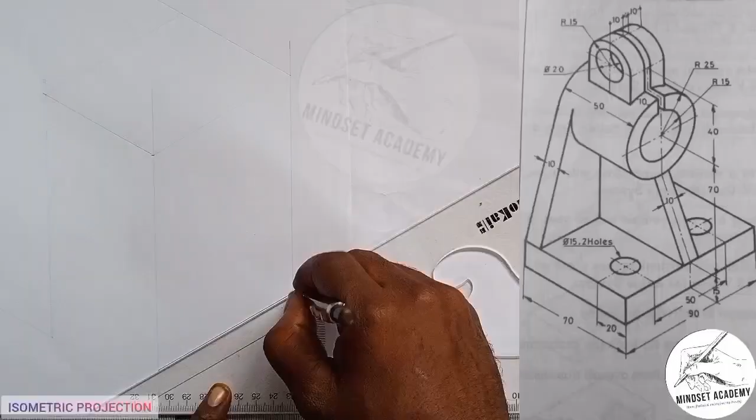You're welcome to my channel, Mindset Academy, where we want to reproduce the figure that is displayed at the right hand side of the screen in isometric. It is a machine component and we are asked to reproduce it in isometric.

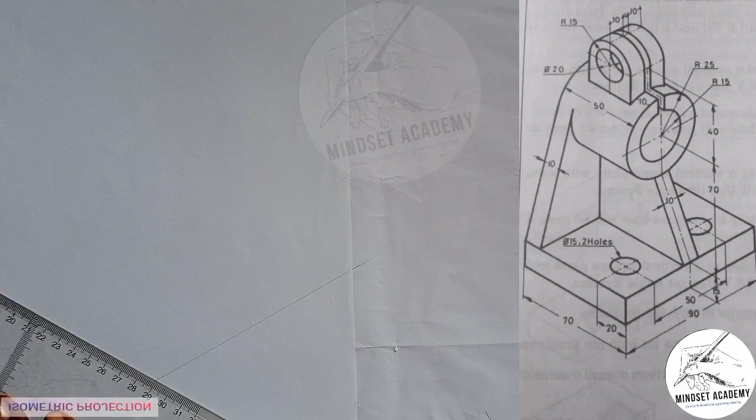So the first thing you have to do when you hear the word isometric is for you to draw your isometric axis, which will have the x, right? Let me make this more visible. We have the x, and also we have this also, and also we have the y. That is all the height.

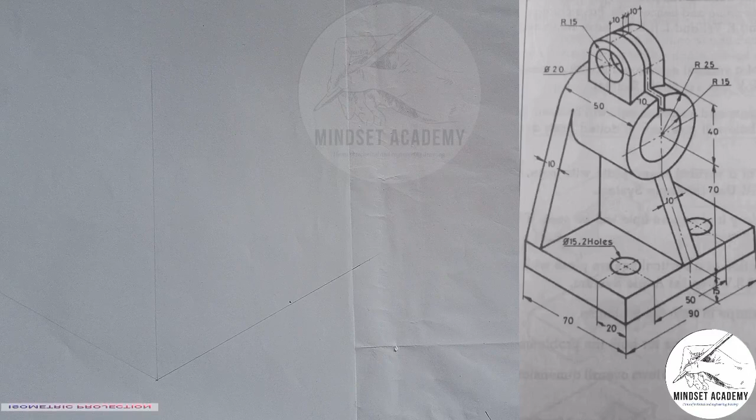You can see that. Now the next thing we'll be looking at will be the entire length, which is from here to here, and they're giving us 90. And I'm going to measure the 90 on my meter rule. From this point, I'll measure 90. This is my point 90 here. Then the entire from here to here, which is 70, is from here somewhere around here, and I'll measure the 70. So from 0 to 7, giving us 70.

Consider that. Then the entire height is given to be from this point to this point is 15, plus from this point to this point here is 70, making 85, plus from this point here to this point here is 40, making 125. Then from this center here to this circle here, radius is what? Is 15. So 125 plus 15 give us 140. So the entire height is 140. So we'll just measure 140 from this point here. This is 140 here.

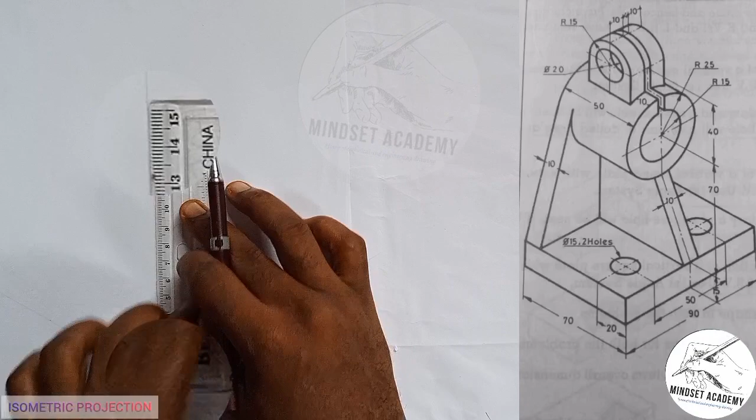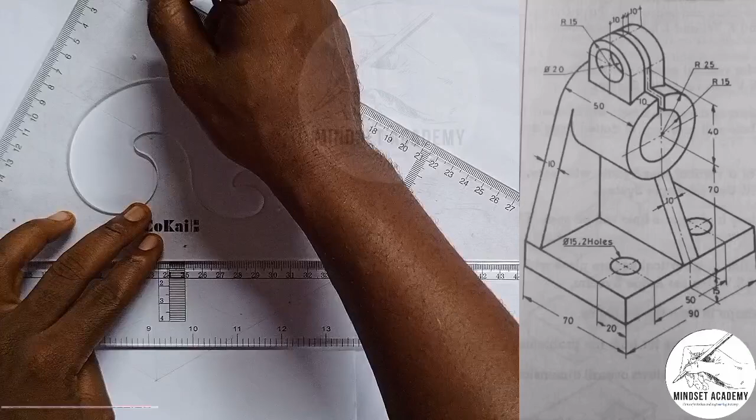Right? Then I'll now complete it by drawing my vertical lines on each of these points. I project this point up. I also project here up too. And I'm going to close it up too. Here too. And here too. Right? So let me just bring that down a little bit. So now this is what we all have here.

Now the next thing we're going to do is to start carving out the image you can see on the right hand side of the screen. Now we know very well that from this point to this point is 15. It's from here to somewhere around here. So I'm going to measure 15. From 0 to 15. This is 15 here. You can see that. And I'll use my set square.

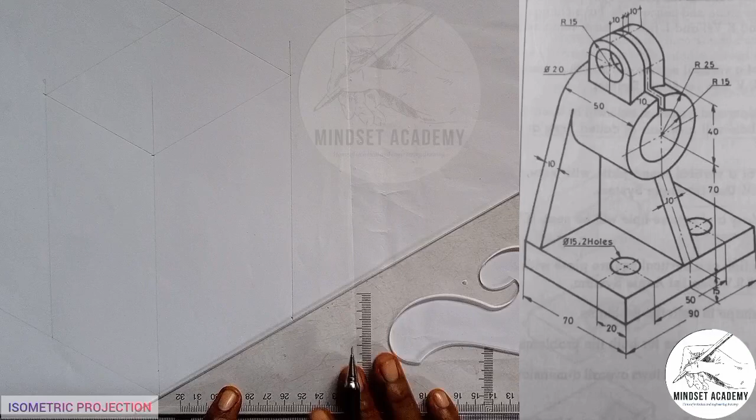What you can see is that they're all thickened. So you can start thickening them here just to save our time. From here to here, it's thickened. Then 15 I measured is also thickened. Right to this point too, which is thickened too. I'm going to take it from here. And also take it from here too.

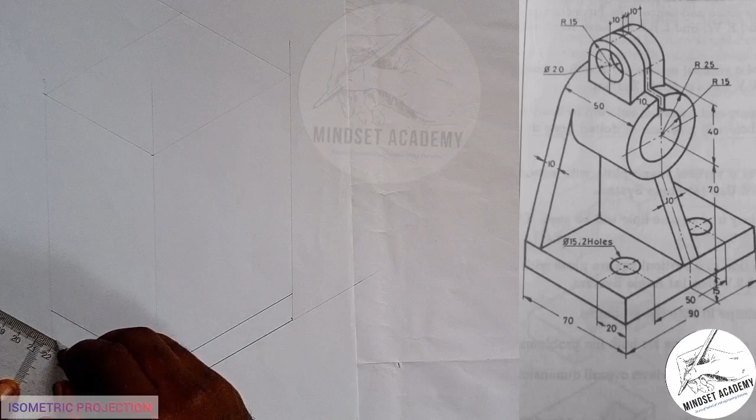Right? And I'm going to close it up this way. I'll close it up too this way. And at this point too this way. You can see that. Now I will just try and complete this point. At this point here, just draw a line to make it form a box. Faint line.

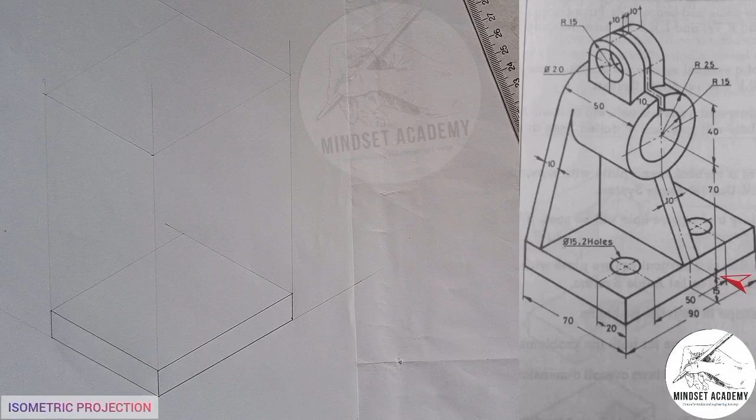Good. Now the next thing I'm going to do is that the thickness from this point to this point is given to be 10. But I need to get the height first. The height from here up to the center of the circle is given to be 70. Now we're talking about center of the circle. So the first thing I'm going to do is to get the center of this figure here.

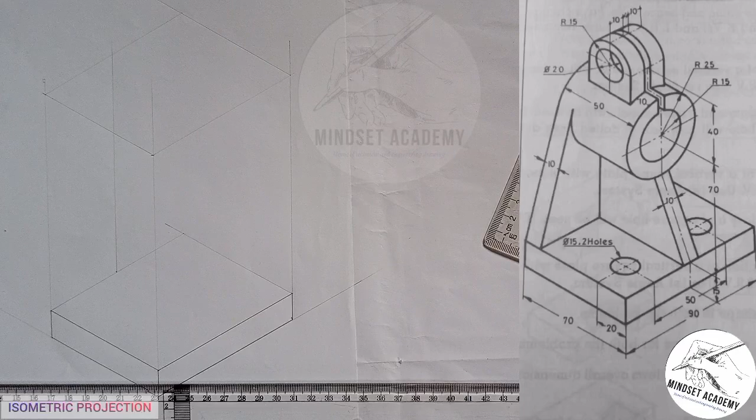So to get center of the figure, we know it is 90 from 0 to this point. What I need is 45, half of it, right? So once I get half of it, I'm going to project it up this way, right? So on that line, I'm going to measure 70 because 70 is from this point here to this point, which is the center of that circle. So I need the center of that circle. That is where I'm going to start my measurement from, right?

So I'm going to measure the 70. So from here, I'll measure the 70, from 0 to 7 is 70, right? Now what I'll do again is I'm going to project that line of 70 in this direction. You see that? That is where the circle will fall in.

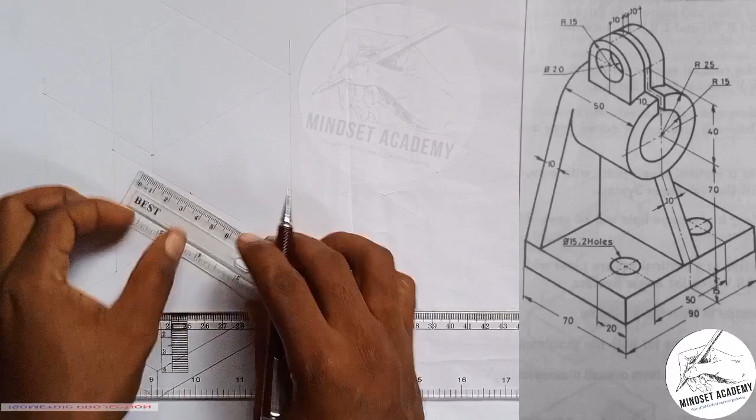Now if you look very well on that line, you discover that the length of that cylinder there is 50, right? So I'm going to measure 50 on that point there. So from here to here is 50, right? So on that point 50, I will draw four intersected lines. Like I'll draw my vertical line on that point this way, right? And I'll also draw the horizontal line this way too.

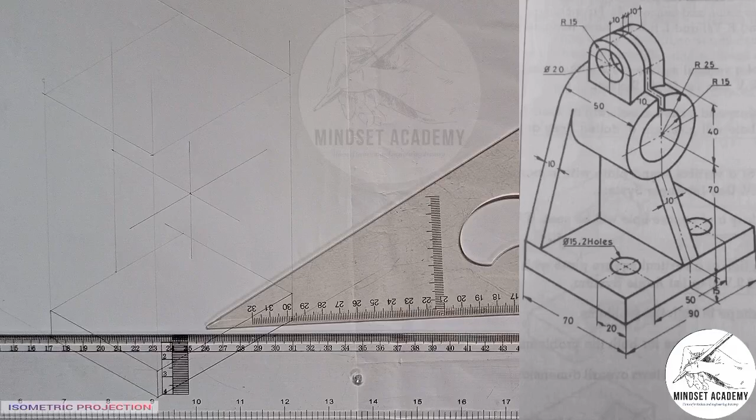You see that? So on that point, I'm going to construct a circle on that point there. Now the radius of this circle here is given to be 25, meaning diameter is 50. So I'm going to take radius of 25 and I'll start working with it. Radius of 25, I'll measure it on my meter rule. You can see that from this point to this point is 25. So that is what I want to construct that outer circle.

So I'll measure 25 on my meter rule. 0 to 25 here. Alright. And I'll place it at the center point here. Right? And I'll mark up, left, right, and down here. So on that point, I'm now going to draw a box. Right? I'm going to draw what? A box.

So I should do this way, passing through that point. I'll come again, passing through this point. I'll do the same thing. Then I'll stand it up this way, passing through that point. I'll do this way, and this point too, passing through this point. I'll do it this way. Now this is the box I have brought out.

So what I'm going to do there is I am going to start constructing my circle by joining the diagonal first from this point to this point using ordinate method to construct the circle. So I'll just construct here to touch here. You can see that. And the next thing I'm going to do is to pick a point from here, the center point. You can actually start from here, depending on what you want.

Then I'll join it to this point, right? I'll come also, I'll do the same thing. I'll join it to this point. Now this is where they are meeting, and that is where I'm going to construct my circle. First of all, I should be able to use faint line to construct the circle. So when I place it at this point, I'll take it here. Now see, faint line first.

Right? Then I'll come here too. I'll place it here, right? And I'll give it 2, ensuring that it is touching there. So just like this. Right? Then I'll place it here. I'll do the same thing here too. Connect from this point to this point.

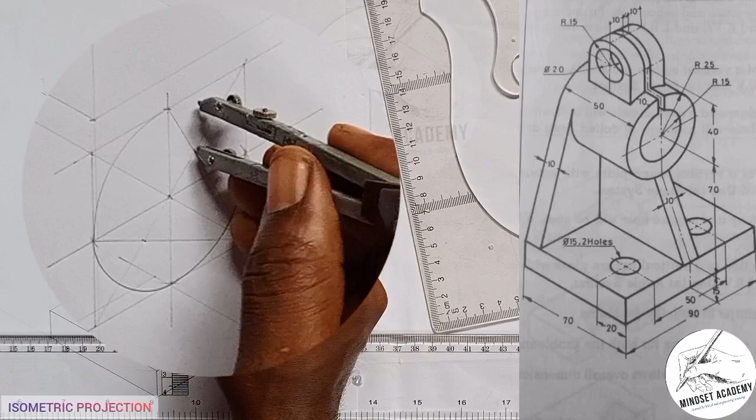This is what we have. You see that? Then I'll come here too. I'll do the same thing. I'm going to do the same thing here. Right? Now, after we've done that, we've brought out this circle in faint line first.

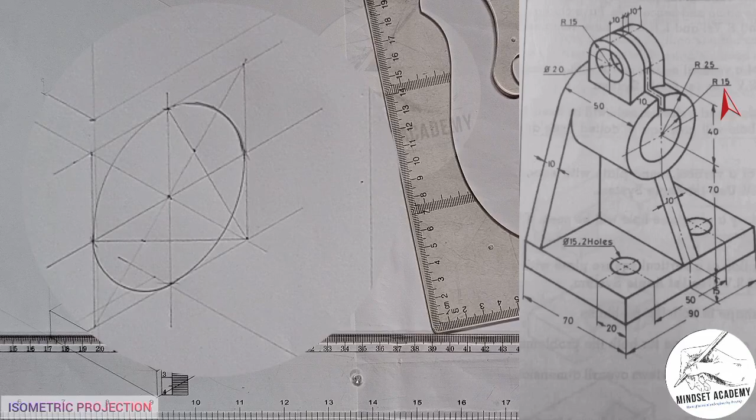Now the next thing we're going to do is there is another circle inside of that circle which has a radius of what? Of 15. But before I'm going to do that, let me just construct that. So let's move forward. Radius of what? 15. So I'll do the same thing. Measure 15 on my meter rule this way. 0 to 15. Right? And I'll place it at the center point again.

I'll mark up. I'll mark left. I'll mark down. And I'll mark right. This way. So these are the points that we have here. Right? So I'll draw my line passing through those points. So starting with this, you have this way. Then I have this too. Right? Then I'll bring it down. And I'll bring this down too. So I brought out that shape, right?

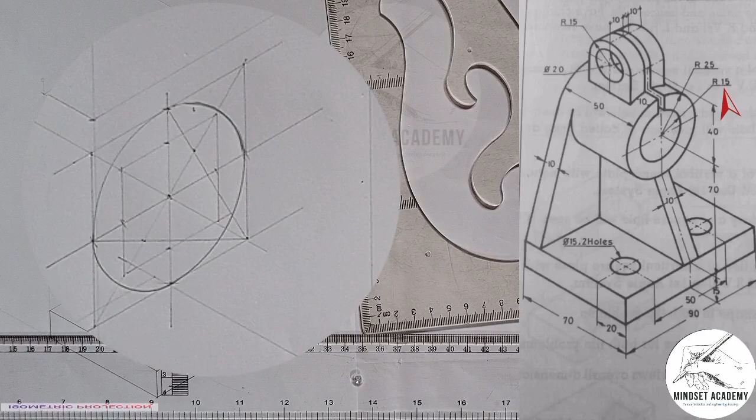So now you do the same thing. You take your pencil and your rule, just like what you did here. You did here too. Take your line from this point using ordinate method. And I'll join here to here. And I'll also join here to here. So this is where they're intersecting at this point again. That's for the smaller circle. So once I place it at this point, to this point here,

we have this. Right, I'm coming to do the same thing here. You can see that. Okay, now come here. This point where the line meets here. And do the same thing. And here too. So now this is the circle that we brought out here.

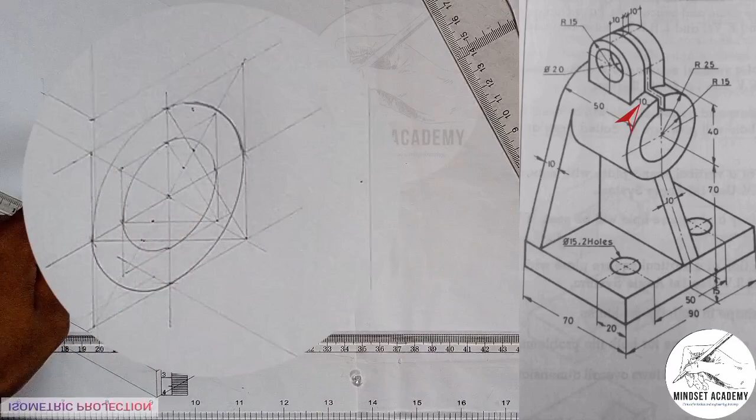So the next thing we're going to do is that if you look from here to here, it's 10 millimeter away from this point here, right? Is what? 10 millimeter away. And from behind also, we have another 10 millimeter. How would I say 10 millimeter? This figure on this object here, this figure you see, the radius is given as what? As 15. You can see from here to here is 15.

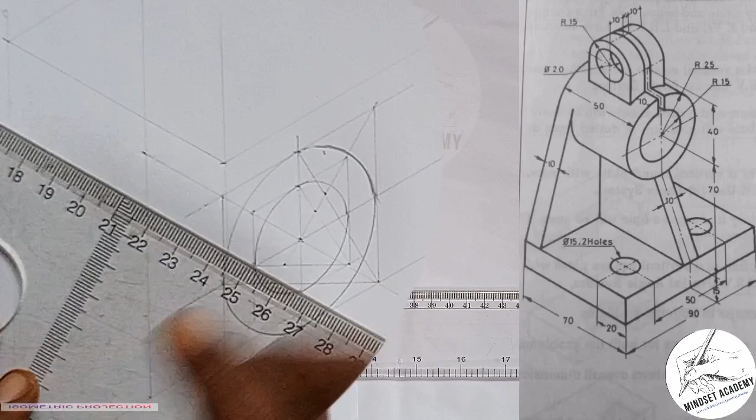That means the diameter of that curve there will be what? 30. So that means the distance from here to here is given as what? As 30. So once I remove 10, I measure 30, the remaining part will be what? Will be 10. What I mean is this. If I project here out this way, the end of this here, right? Or better still, let me stick with this.

So once I project here out this way, that is the edge of my box. I'm going to measure 10 first. Let me start with 0. I'll measure 10. Then the next one will be what? 30. So it will be 0, 10, 20, 30. Then the remaining 10, because the entire length of that figure is what? Is 50 altogether now, so it's remaining 10.

So what I will just do there is I'm going to construct my box at those points there. So if I complete this way, right, then I'll complete this too, this way, and I'll bring this down this way, right, then I'll close it up this way, I'll close it up too, then here too.

Then the end point here that I brought down here, I'll close it up, and this one too, I'll bring it down too. Close it up, right? So it's remaining this. You see the reason why I'm doing all this? Take this out, bring this down. So this is what we have.

I brought out 4 points. Why? Because we have 4 circles there. From here is one circle behind. Here another circle making 2. At this point, where this shape will fall on, the other circle, that is 3, then this making 4. So I'll start constructing the same thing I did there. But it is easier now with the way I've done it.

How? I have a diagonal here, right? I'll also draw another diagonal here too. In every point is a diagonal like this. You can see that. This is another diagonal. And this is another diagonal here. So I drew a diagonal for every point. Is that taken? And what I'm going to do now is to transfer the points.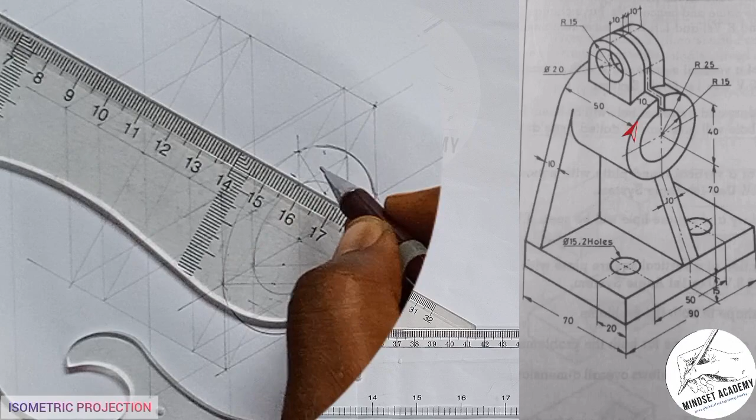Which point am I transferring? This bigger point here, this one. So I'm going to transfer it to each of those points. So this one is 1, this is another one here, this is another one here, this is another one here. I'll come down again, the other big one, this point again, I'll transfer it to this point, to this point, to this point. Now you see what I'm trying to do.

So here, this is my reference point, and this side also is where I'm going to end it. So what I'm going to do now is, if I place my compass at the end of this rectangle, which is this point here where they are meeting, I'll take it to this point and I'll draw this arc here. You can see that.

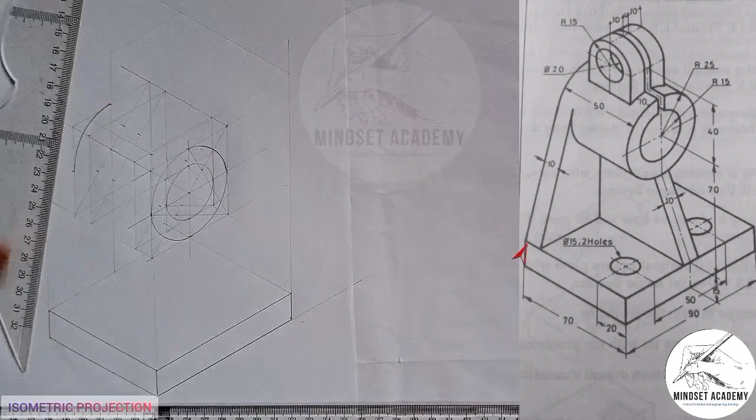What else am I doing? I'm going to join this point from here to here. So I'll join it to this point here. You can see that. Now the next one, I can easily project this way, right? Now we'll do the next one. What I did here, I'll do it for the other side too. So I'll use the second side here, which is this. I'll come to this point, and I'll move to this point.

Just a faint line first of all, right? Then come to this point. Then I'll give the remaining one too. You're going to get that. Just that. Then I'll come here too. After doing that, I'm going to join this point.

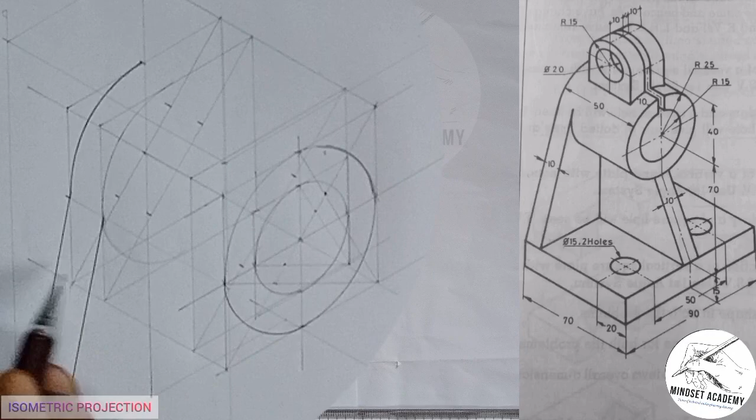I'll measure 10 here because the distance from here to here is 10. From 1 to 2 is given to be 10. Then I'll connect this point to that point. You can see that. When I'm doing that now, from this point here, I'll join it to this point. The center point here, I'll join it to this point here with my faint line first of all. You see that?

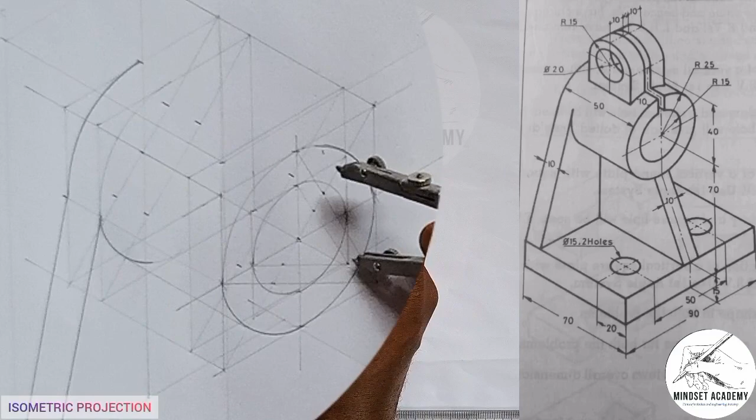You see that? So the next thing I'm going to do is construct another arc at this point here. Now I drew an inclined line here this way. So when I place it at this end and I take it to this point here, I'll draw another one here. Get this straight line first.

Right? And then I can come to this point, and I'll have this point I marked out. Just stop here. So now we're moving on. So what I'm going to do now is this.

I will measure this figure that we have here, right? Where the figure is placed, if you calculate 10 plus 10 plus 5, that is 25. So I actually need 12.5 on both sides. This is what I'm going to do here. So we know that this is the center of the figure here. If I project it to this point here, we're going to measure 12.5 to the left and 12.5 to the right. That will make it the 25 there.

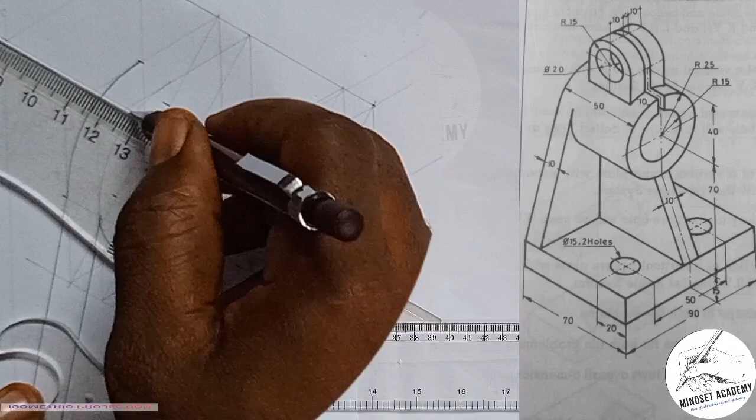So if I place it here, I measure my 12.5, starting from 0, right? This is 10, 11, 12.5. Once I place it at the center point here, I'll mark on both sides 12.5 and 12.5. Right? I can even now project it from this point here, take it here, then from this point also, I'll take it here.

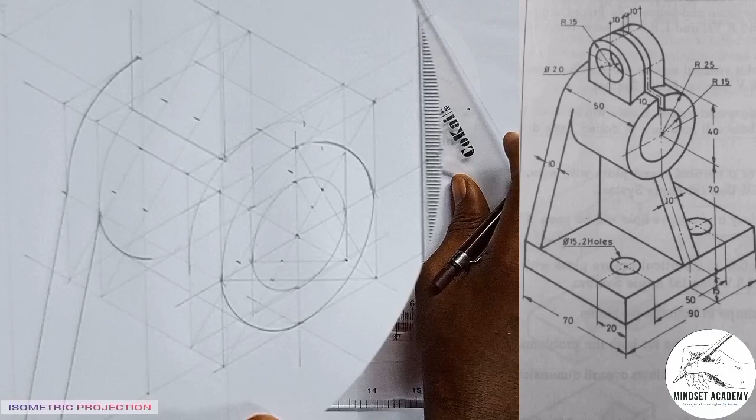Right? This is where I will now project them up. So those points, I'll take them up. Now projecting these points up that you have marked on the circle, I'll project here up this way, and also project here up this way too. Right? And also at this point too, I'll project here up. All those points I am projecting them up. So the next one here is around here. I'll project it up too. Right?

So because I marked from here to here, we'll mark this point to this point. So get that point up too. This is what we have here. Now, one thing you need to understand is this. From this center here to this point here is 40. And this point to here is given as a radius of 25. Right? So if you remove 25 from 40, it will remain 15.

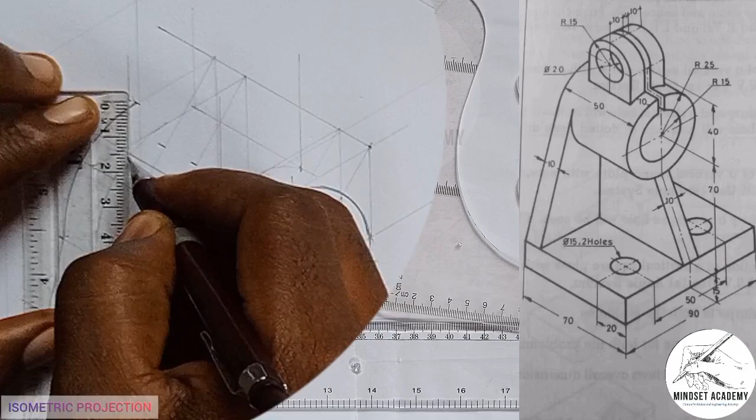That means I'm going to measure 15 upward here, the remaining part. Let's say this is from this point here. I'm going to measure 15 upward. This is the 15 here. Right? So I can easily thicken it. That's 15 we have. And similarly, I'll do the same for here too. I'll thicken here to this point here. And I'll do the same thing up here too. Faint line first, and I'll thicken here.

See that? Now I'll take it up. We're told the distance is 10. So I'm going to measure from here to here. Now measure 10 on both sides. So from here I'll measure 10, and from here I'll measure 10. So it means that this point you're seeing, I'm going to bring it down this way and this way. And I'll take it this way.

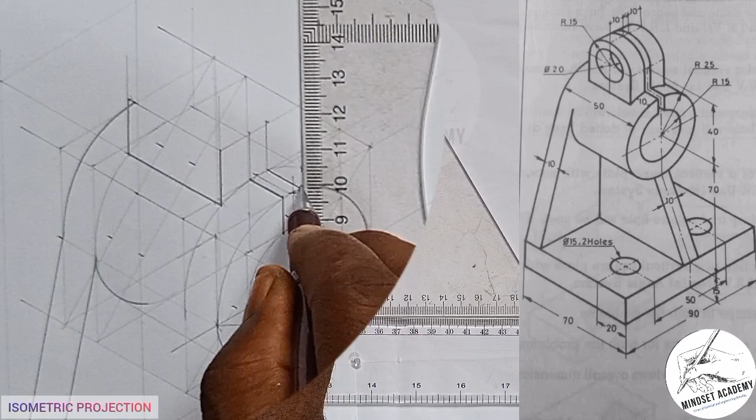So this is thickened, and this is thickened too. Then this is also coming down this way. What you're seeing on the screen is also coming down this way. And if I take this in, then bring this down. Right? So we're still moving on.

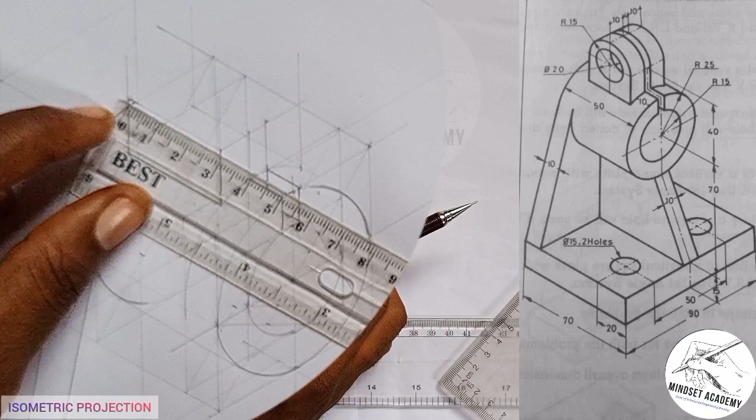Now that I've done that, it means that I need to get the center of 30. From here to here is given as 30, right? So I'll get the center where I can easily construct my circle. Why am I using 30? Because the radius from here to here is 15. So the radius is 15, meaning the diameter is 30. So I'll get half of 30, which is 15. This is 30 here, right? So this is 15 here.

So with the help of my compass, I have this way, right? We know that this is 15 too. Everything we have here is 15. So I'm going to mark 15 up too. This is 15, this is 15. So everything is more like a square. So let me bring out that square this way. Then I'll take this up this way too, and then close it out. I'll do it for the other side too. So I'm closing it up, including here too.

Now, this figure here is where I am going to draw my circles. So let's start. I'll draw a diagonal here. I'll also draw a diagonal behind from this point, and just complete this. They're meeting here. I'll draw a diagonal too from this point to this point. I also do a diagonal from this point to this point.

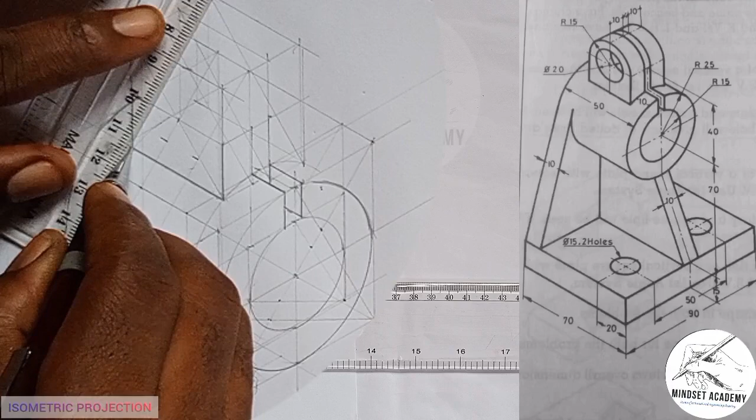So if I move this to this point here, I also draw a diagonal from here to here, just doing the same procedure. So this is what I have. My circles will be falling on this part. If I take a point from here to touch here, I'll mark this. I take a point from here to touch here, I'll get another point here. So from these 2 points now, you place the compass at this point here, and you take it here, and you're going to draw a semicircle.

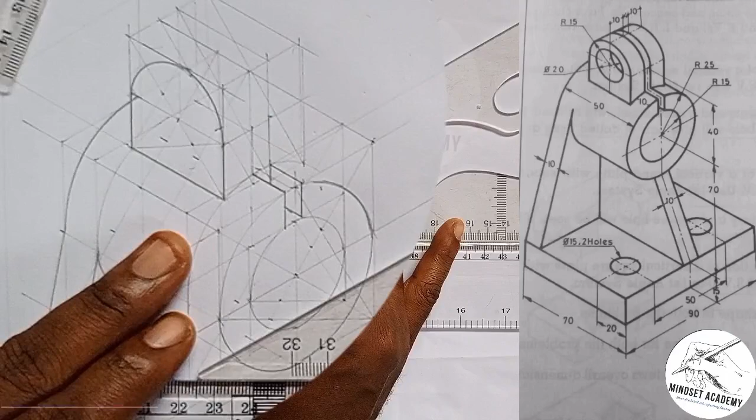Right? And from here too, you do the same thing. You see that? That is for the first one you see there. Then the next one is, I'll just transfer those points. I'll transfer this point, this inclined line, this point here, I'll transfer it to the next guy here, which will be here. Then this next point too, I'll transfer it to the next one here, which is here. And I'm going to repeat the same thing, right?

So first of all, depending on how you understand it, I should just bring this down this way, so I'll have that box there. Then this also, this box is already here, right? We already have it there. So I'll just take my compass from this point, right? I'll take it to this end here. And I'm going to draw an arc at that point from here.

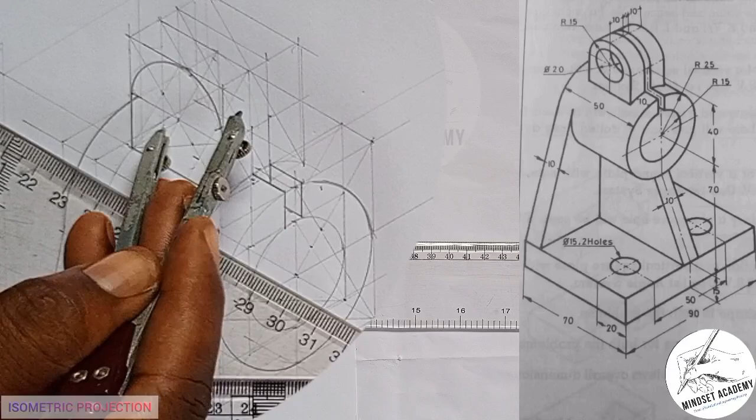I see that. And I'll come here too. I'll do the same thing. Just stop at this line. Right? And now let's close them up. Let's close from here up to this point.

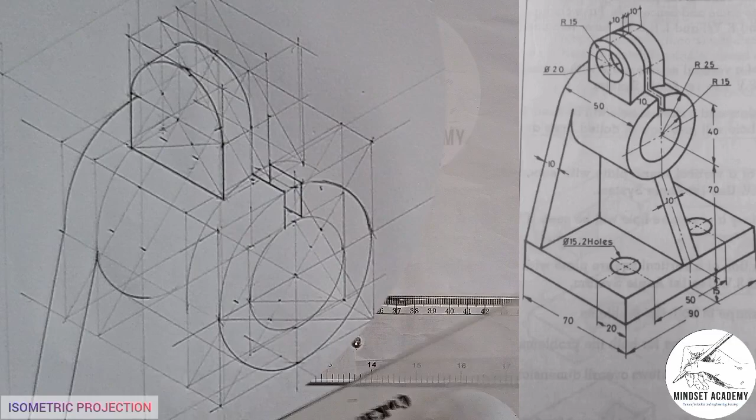Right? So I'm going to repeat the same process for this. Now, you transfer the point 2 to that point, the center point, that line, got the line here. This point, I'll transfer it to this point. I'll also transfer this point to this point too. And I'll repeat the same process, right? Taking my compass to where this line meets this way. You trace it, this point, and this line they're meeting here, right? And I'll do the same thing I did earlier.

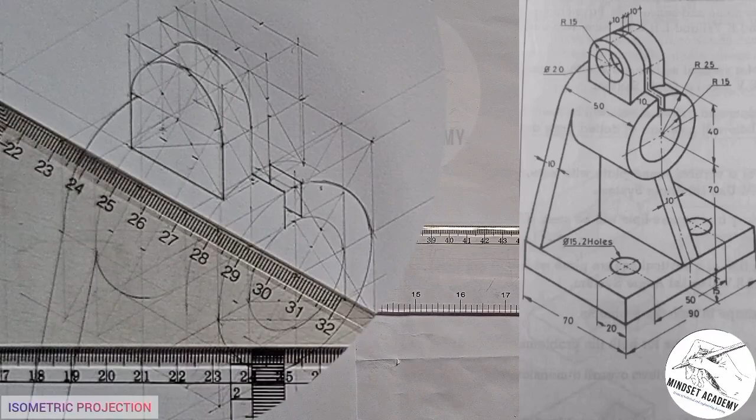So I need this point here. I need this point, my reference point here, and also this, which is here. Just to run my target. Then I'll place my compass. I'm going to do that. Right? Now come here too, and do the same thing here too. So bringing this down to this point.

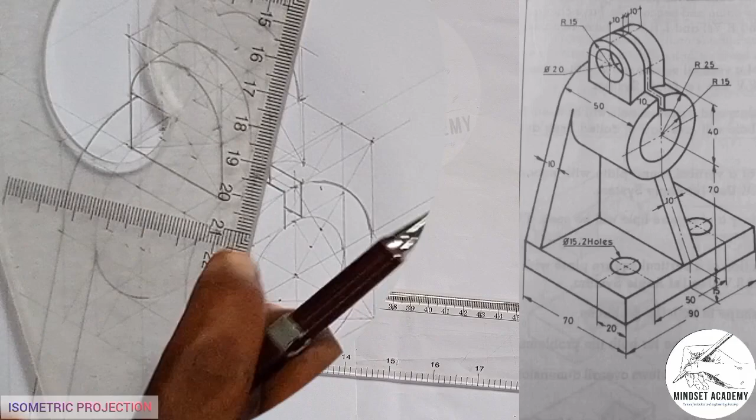Right? Then I need to construct the other one here too. So transfer this point also. Just the same thing, we're just replicating. So to this other third inclined line, transfer that same point there. Right? Then you come here too, transfer it to the third line. Then where they meet, where this line is meeting with this, talking about the third line, they are both meeting at this point here. Right? So that's where we're going to construct the other curve.

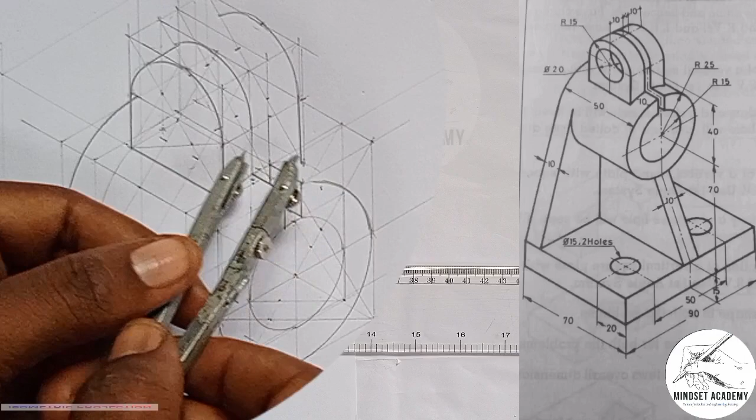We're taking it here. I'll have this. Then I'll come to this point. Do the same thing. Then I'll stop here. So with that, casually just sticking from here to this point. Then close it up. Right. Then what else is remaining there? Let us bring this down.

So there's a circle here, and the radius of that circle is given to be 10. If you look, we have 20 here. So the diameter is 20 from here to here, and the radius is what? Is 10. So I'll just measure 10 on my meter rule, this way. Alright. This is 10 here. And I'll place it at this center point here where the circle is placed. And I'll mark up, left, down, then right.

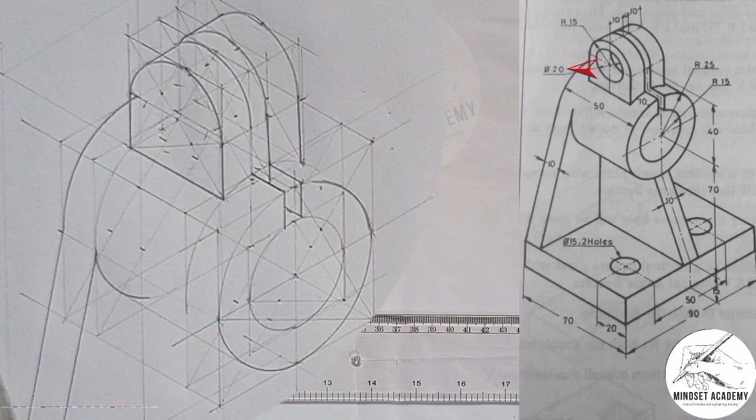This is where I'm going to draw my box. At this point, draw a box. At this point, two vertical lines. Then here also, three vertical lines. And close it up. Let me see again. So close it up. So you see inside here that my box will be, my circle will be.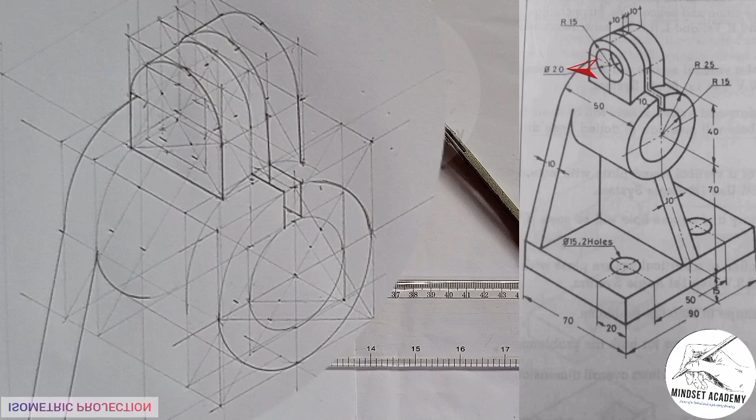So I can use a French curve there just to make my work faster. Just look for the one of best fit here. So I can see that it is this. Right? I'm having this. We have that. Then there's another one inside too. Just ensure the distance is given to be 10. We know that. I can easily measure the 10 inward. Right? So from this point, I measure 10 and just place it there, this way.

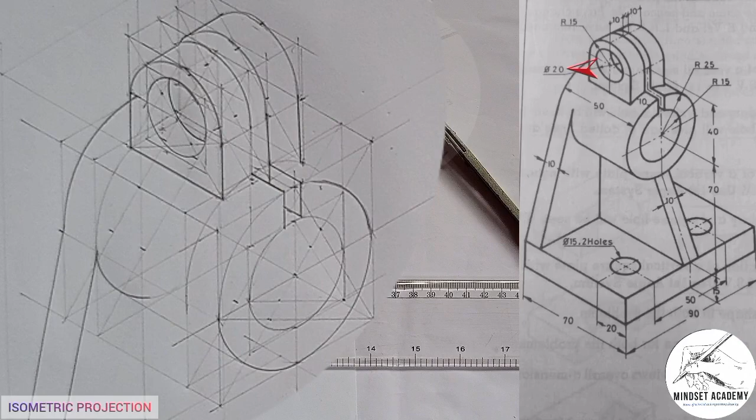Now the next thing we have is to take this out with the help of my compass. I'll place it here, get to this point. Now here it is. Then here also the same thing. I'll take it in here. Now the next one too, I need to do the same thing with the help of this.

Let's see, we have this here at this point. We're taking this. So let's join from here to here. Now the next thing I'll be doing is taking here too, from this point to this point.

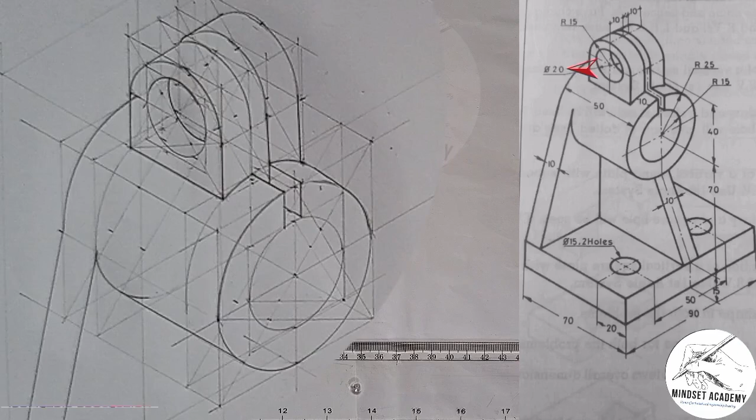Now what else again? We're going to measure what is remaining. Now the thickness from here to here is 10, right? So I'm going to measure 5 each at this point. This is 5 here, you can see that. And I'll place it at this point here. I'll measure 5 and 5 here. Similarly, I'll transfer the center line here.

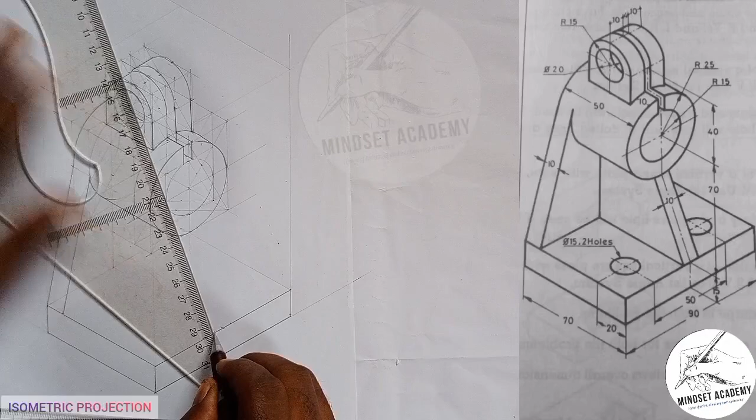The center line in between, which is 45, to this point. Or I can just easily measure 45 from here to here, and I'll do the same 5 to both sides. Now I use 5 here each. I'll come here too, I'll do 5 also, 5 and 5. So I'll just join from this point to this point, on this point to this point.

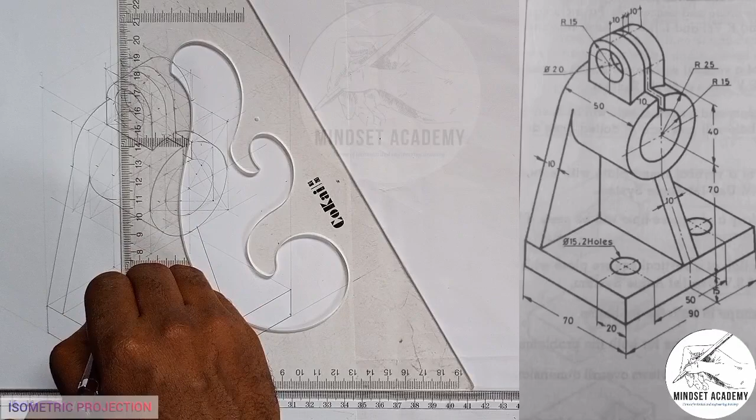And I'll use my set square. Just take this line this way, as you can see, from here to here. I'll close it up this way. Now take it up to this way, and close it up this way. Now the next thing is I'll take this one to this way.

And what else again is remaining? So I'm usually taking this. The next thing you do here is there's a circle at this point around here and here, and this is the 2 circles here. We are told the diameter is 15, so the radius is 7.5. But where is it placed? If you look from here to here is 50, so it means from the center of this point here to here is 25, and from here to here is 25. So I'll measure 25 from here to here.

So let's do that and see. I'll measure 25 on my meter rule like this. 25 from here to here is 25, and I'll place it at the center here. I'll mark 25 to this point and 25 to that point. Then from here to the center, we're told, is 20.

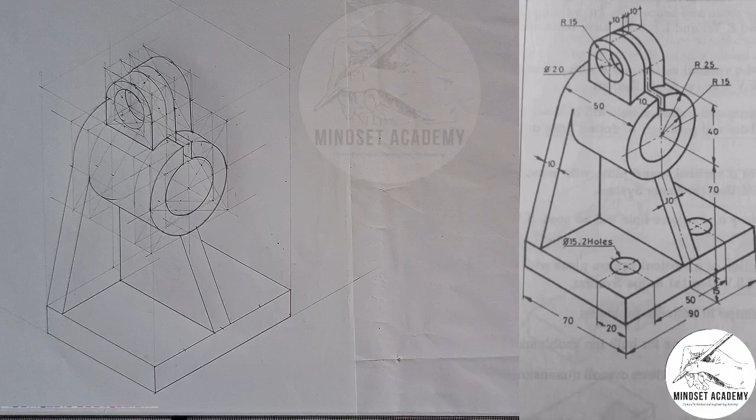So I'm going to measure 20 from that point. With the help of my meter rule, I'll measure 20 to this point, this 20 here. So with the help of my set square, I'll place it this way and draw it out this way. Also here, at this point too, I'll do the same thing. Where they meet and where they meet, so they are meeting here.

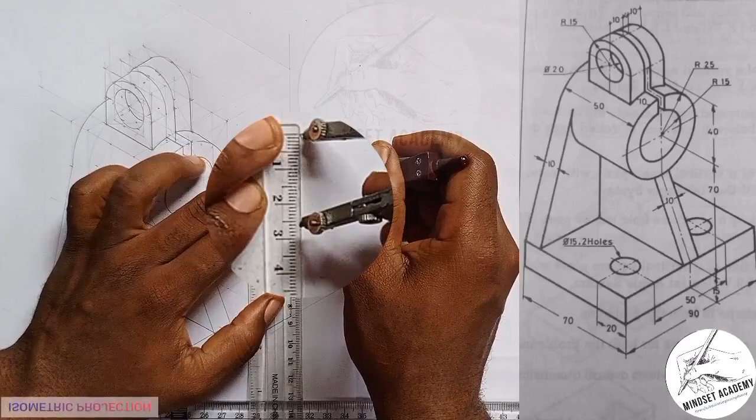So this is where I'll draw my 7.5 each in those places. The diameter is 15, so here is 7.5. From here, this is 0, this is 5, this is 7.5 around here. So I'll put the other center here. I'll mark up, mark down, left, and right.

We'll come here to up, down, left, and right. So I'll form my box there with the help of my set square, in the box here. This is coming here, this is coming here, we'll do this too. Front line like this, like this, like this, this, like this, like this. So this is how you construct your circle at this point.

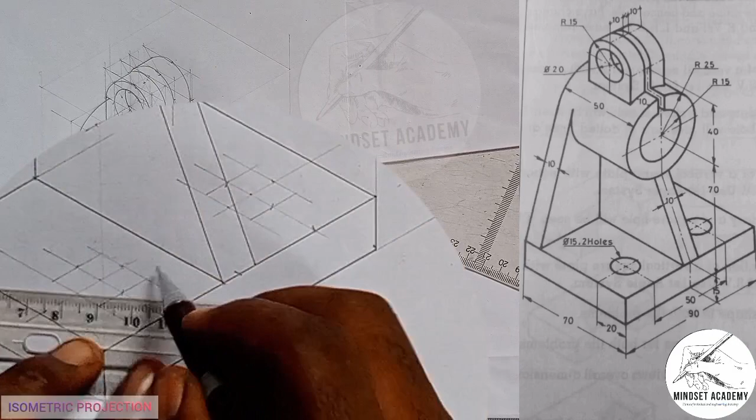To take this to this end, and take this to this end. This is where they are meeting. Come again, this to this end and this to this end. This is where they are meeting. So this is where I'm going to carve out my circle.

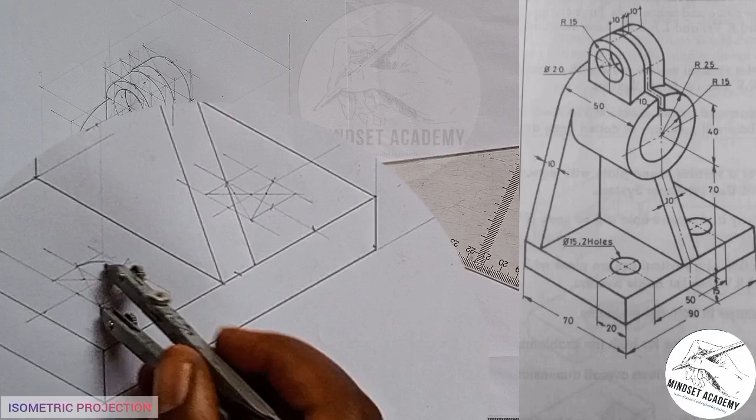When I place it here, I have this. I come here, I have this. After that, place it here too, I have this. So let's do the same thing for everything, or you can better still make use of your French curve. Once you can see the line that best fits into that circle, I believe this will work out well, this will work out well.

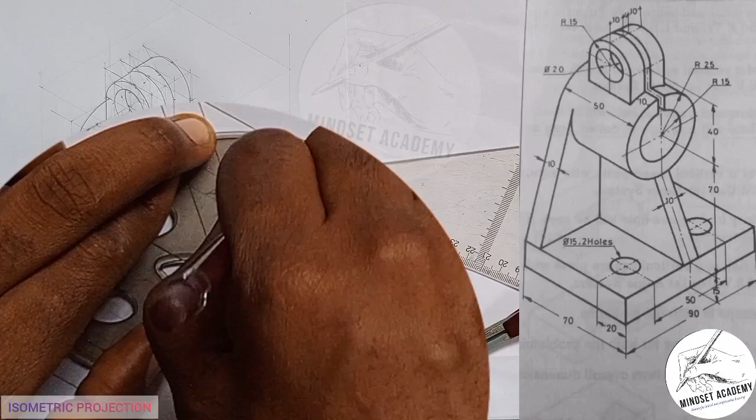Let me just do it here. Let's take the line of best fit. You can just come here and let's do this way. Stop here. After that, we'll come and just complete this.

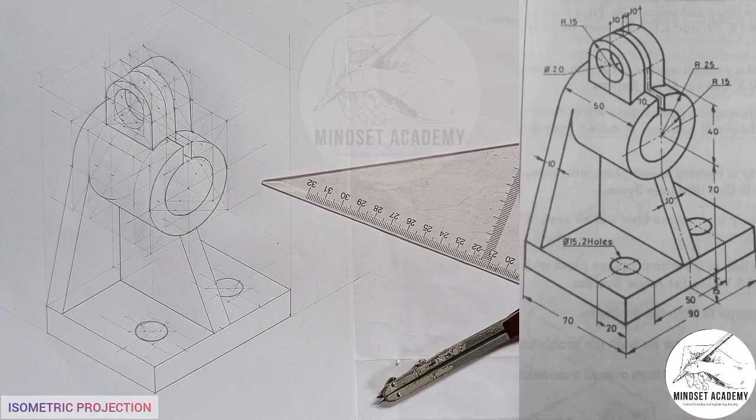So we have that, right? So this is what we have here. We have successfully reproduced the figure that you can see at the right hand side of the screen.

Now the next thing we're going to do is to draw the orthographic projection in our next video: what you see when you look at the front from this side, and what you see when you look at the side.